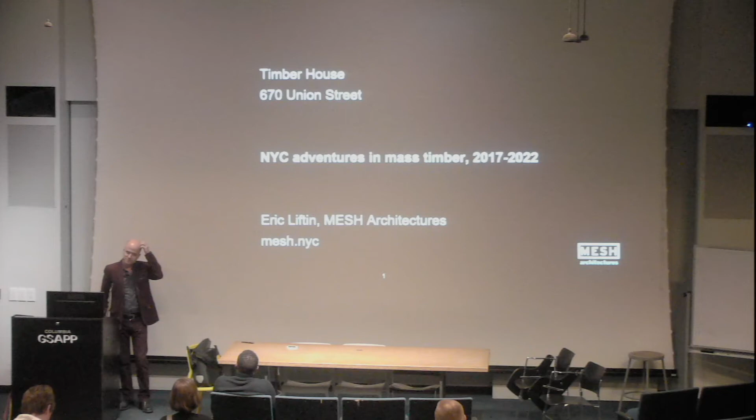First of all, just out of curiosity, how many people are from the real estate program that are here? Pretty much everybody, okay. Is there anyone from architecture? Yep, okay, and you're in both, I know that. Okay, great. So I'll get right into it.

So I had done a few years ago another project with the same partners. I came at it as a developer and architect, but I had partners who were providing the big funding, and there's another small family development company called the Brooklyn Home Company. They do their own projects, but we had partnered on this project on Congress Street in Brooklyn, and it worked out well. It's a pretty small project, but we did some nice things with it, and we decided to do another one together. A friend of mine lived on this block and told me about these two houses that were for sale.

This is interesting how these things happen. Finding a site is one of the most challenging things, and if you just look at the ads from the real estate brokers, that's not always going to do it. But this was from a guy I knew, lived on the block, knew about these people selling these houses. We thought, this is interesting. You don't often see these two houses come up for sale in a nice neighborhood like this in Park Slope. So those are the two houses, and we came to a deal to acquire those.

And then we started talking to people next door to see if we could get another house and try to expand our site, which is the first thing, of course, that you try to do in this situation. We were interested in this one. It had been abandoned for many years. No one knew where the owners had gone to. We had the help of an Israeli real estate broker named Patrick, who was an incredible detective, and he was able to find these guys upstate. They had left in the middle of the night one time and never come back. And so we were able to make a deal to buy that one.

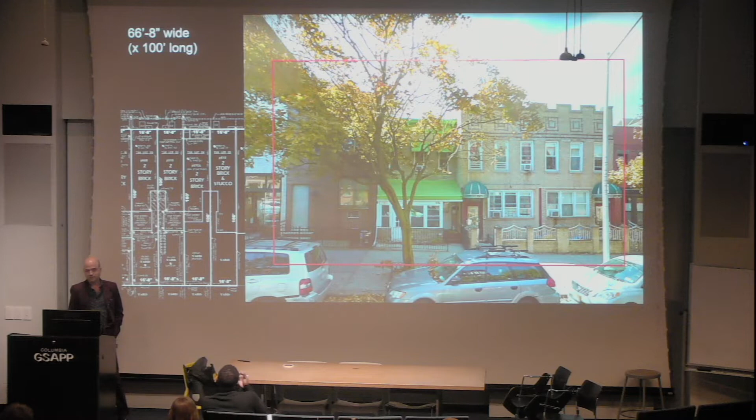Then the one in the middle, that worked out too. We got that one as well. So we had all four sites, which is great. This block of Union Street has a very colorful past, which I won't get into. It had fairly unsavory things happening back in the 80s, and now of course the whole neighborhood's changing. So we had the four sites together, 66 feet 8 inches wide, which is a nice site to have. It's 100 feet long, which is a very typical length in New York City. It's on Union Street, which also has the benefit of being a denser zoning district than the neighboring districts. It's an FAR 3. Most of the ones around there are FAR 2. So that gives you denser.

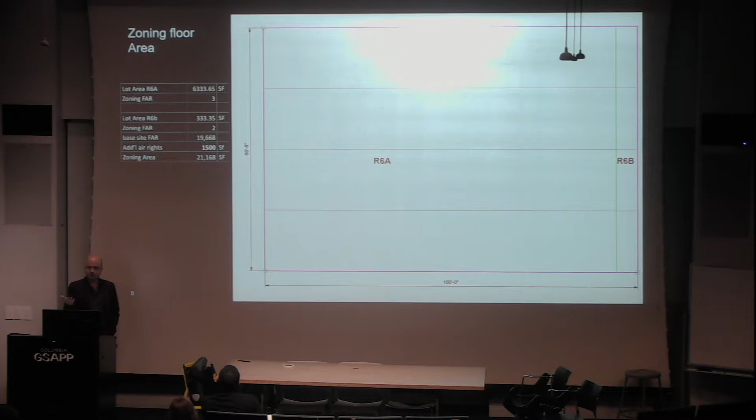How many people are familiar with zoning? You guys have had that already? Yep, all right, so you've done that already.

So the first thing, of course, we want to do was a quick test fit of the site, see what we can do with it. We know we have our 30-foot rear yard. As you probably know, New York City zoning is very prescriptive. A lot of the time the zoning envelope ends up being your building envelope, depending on what your site looks like. This is a 70-foot height limit, and so what the zoning indirectly suggests is a 7-story building with a 70-foot height limit.

I don't like to do that because that gives you, at best, a 9-foot ceiling height, and often lower because you're dropping the ceiling for ventilation and such. An 8-foot, 8.5-foot, 9-foot ceiling, not so great. So I like to do a 6-story building with a 70-foot height limit. That means even more that to get all of your floor area, and as you know, you need to use all the floor area you possibly can, you're basically building out the whole envelope. So you're going to have your 30-foot rear yard. You're going to put your core there in the middle.

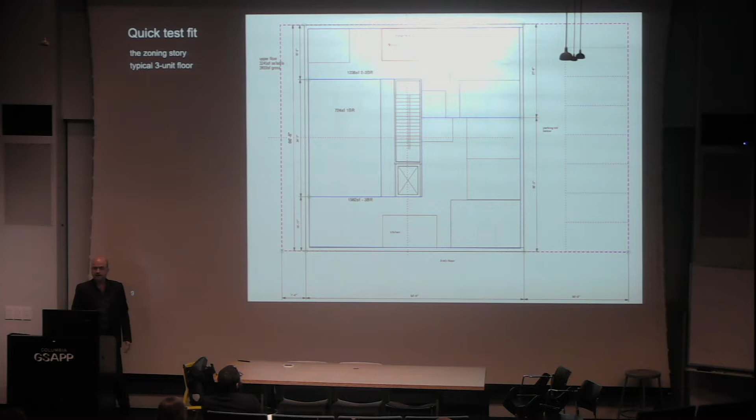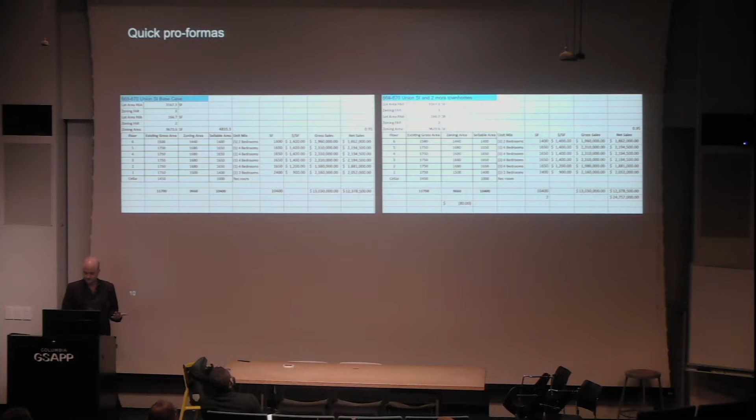That's going to be about 25 feet in the front, 25 feet in the back, and then you can do a very quick test fit and see how things are going to lay out, and use that to do a quick pro forma to see how it looks. We did it first with our 2 houses. After we got our 4 houses, we upgraded it to the larger site. And once that was looking pretty good, we took that into the deeper pro forma to really see what we could do.

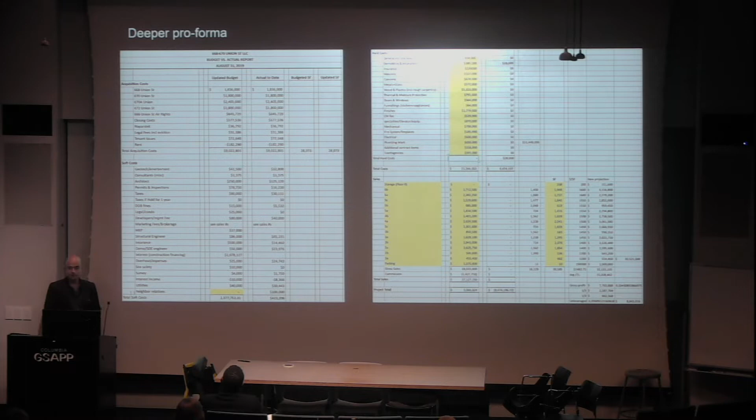Now, as you can imagine, some of this is fairly predictable. Things like the costs, the soft costs, the hard costs to a certain extent are fairly predictable within a certain margin of error. But many things are not very predictable, such as how you're going to sell the units a few years from now. What is the market going to look like? You usually have no idea. You also don't really know how long it's going to take. You usually underestimate that. It usually takes longer than you imagine, which is probably good, because if you really knew how long it would take, you would lose a little bit of the incentive to do the project in the first place, because it takes a long time.

One thing that I did note, we wanted to do a high performance building. How many of you guys are familiar with Passive House? Okay, so everyone's familiar with that. So as you know, that involves making a low energy building that has lots of insulation, although the New York City energy code is pretty much catching up to Passive House standards, at least in terms of the amount of insulation you have to use, the air sealing you have to use. We have high performance windows, triple glazed that seal well, and of course we're going to have ventilation because our building is so well sealed.

We're going to use ERVs to get fresh air in, and to avoid losing that energy of exchanging air, we're going to exchange the energy of the exhausting air with the incoming air to get ventilation continuously. And of course we're going to have no gas, no combustion anywhere in the building. We're going to heat our food, heat our air, heat our water, all using electricity. And so all the energy coming in to do those things comes now from partially renewable sources, but eventually it'll come from energy that's mostly renewable, we hope, in the next 20 years or so. And we're preparing for that future by not doing any combustion. Not burning anything also helps because we don't need flues to be continually exhausting air out of the building, which wreaks havoc on your envelope.

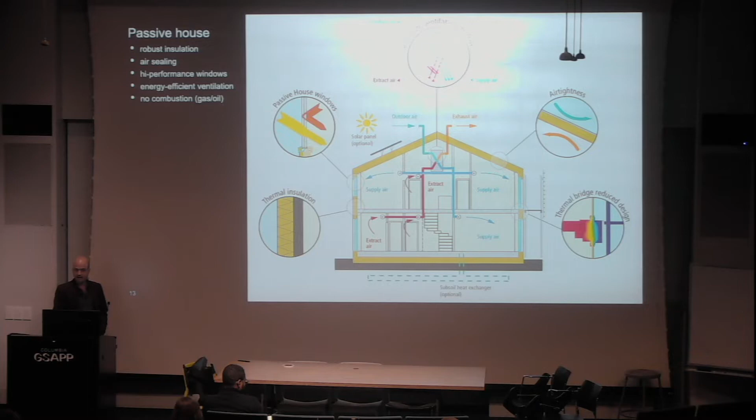So recently I'd been on a jury at Pratt, and the students were studying CLT. And I thought it was pretty cool. I knew about CLT, I knew people were using it, but I hadn't really thought about doing it in New York because it just didn't seem like a New York kind of thing. And so I thought, well, this would be cool. Could we use CLT in New York? And how many people are familiar with what CLT is and mass timber is? Okay, so, pretty much everybody. Okay, well, I'll go through it pretty quickly. Sorry for the review for those who already know about it.

But the advantage of CLT is it's made from taking small dimensional lumber from quick-growing trees from sustainably managed forests, usually out west or north of us in Canada, and using that to get large members made out of wood that you used to have to get out of old growth trees that are 100 years old that are not really practical to harvest anymore. So these quick-growing trees can be harvested, cut into dimensional lumber, 2x6s, 2x8s, laminated together into larger members that we can use to make structures.

The advantage of this is that compared to construction made of steel or concrete, it has lower embodied energy, so that there's not as much energy needed to make it, which is less carbon that is output into the atmosphere and less energy required all around. And it also sequesters carbon.

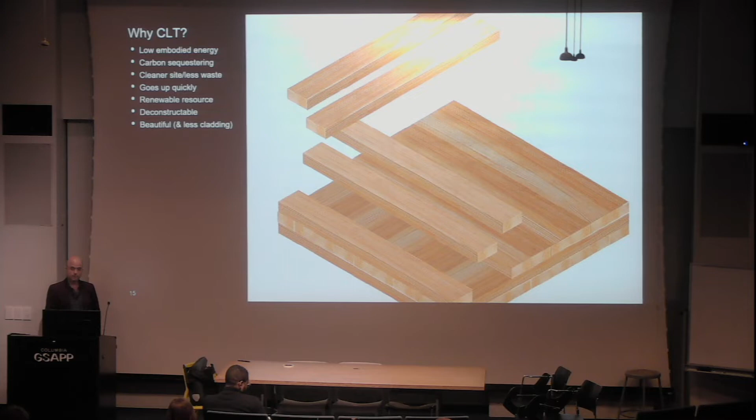So the other thing is that building on a site is complicated, potentially dangerous, expensive, tricky in New York City where everything is so tight. These buildings go up faster, they go up cleaner, there's less waste. Everything arrives at site ready to go. You put it up, you don't have concrete spatter all over the place. It's much, much cleaner in that respect as well.

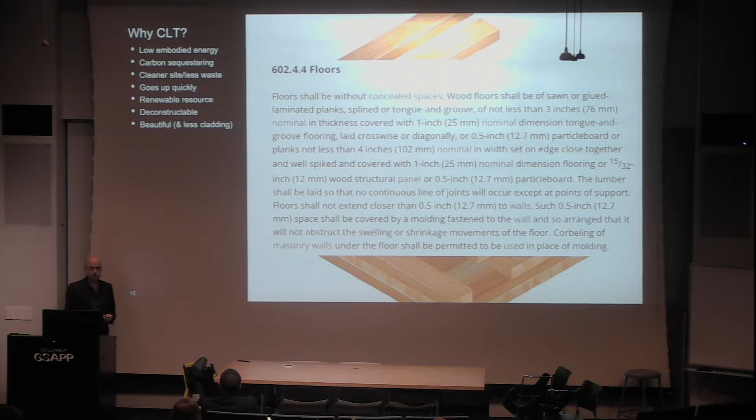But the question is, could we do it in New York? So looking at the code, we have heavy timber as a construction type. It's been there for decades. And it does not mention CLT. So the question is, would the New York City Department of Buildings let us do it? Would it be acceptable under code? And there are some precedents.

At the time when we were doing this design, these are two buildings made out of mass timber in Brooklyn. At the time we were doing this, they were under construction; they're now completed. The one on the left is made out of NLT, nail laminated timber, which is made out of boards that are nailed together instead of laminated with glue. And that's an old way of making mass timber that was in the code because it's old.

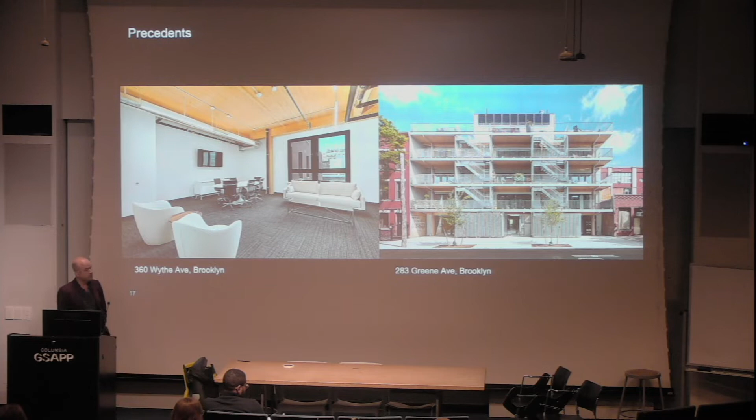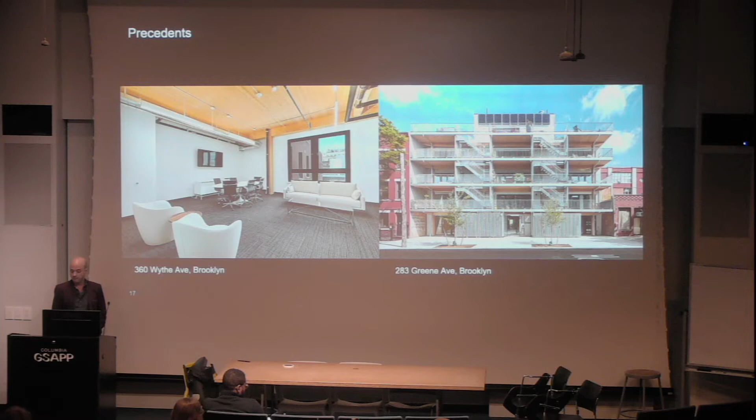And on the right, we have a CLT building on Greene Avenue in Brooklyn, developed by a friend of mine. And that was under construction, and I was hopeful because that building got approval and was going up and seemed to not have any problems, and so it gave me hope that the DOB would let us do it. And we decided to go forward.

So one of the things I love about mass timber is that it's made out of plants. And one of the great things about that is that when you look at it, you can see that. You can see the plants, you can see the patterns of the organic process, you can see the depth, the fractal depth of the material. In fact, neuroscience has demonstrated that we respond more emotionally to surface than to spatial quality. We normally think of architecture as being mostly about the spatial quality, but in fact, the surface is incredibly important. We respond to it, it engages us, engages our unconscious mind and our emotions.

And we respond very well to these natural materials that engage us because in their complexity and the fact that they're non-repetitive, you're looking for patterns. And that has the effect of both stimulating us and calming us at the same time. So it's a very good effect. And so it led to the theme of the building, the concept that guided us throughout, which is this notion of creating life, creating a sense of life in the building.

So to take a very quick detour, at the same time I embarked on a little side project to design tiles. And these tiles are hexagonal tiles, also based on the notion of creating life. And hexagons, of course, are found throughout nature, both in organic and inorganic processes. You know, in crystals, in beehives, in fruits and vegetables. It's one of the ways nature likes to arrange materials, molecules. And so we can do that in tiles too.

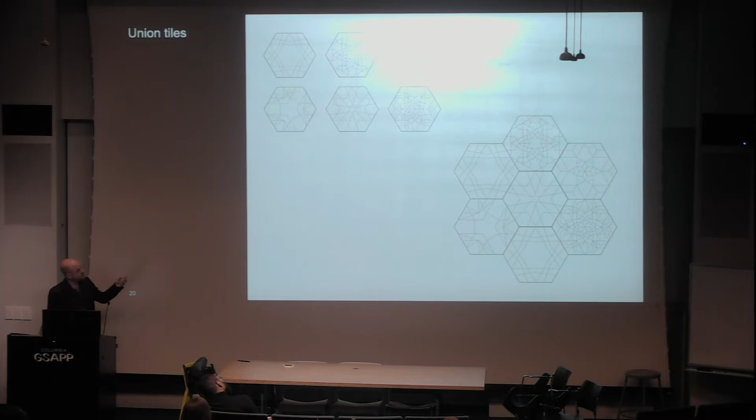And I thought we could combine patterns in tiles in non-repeating complex ways based on simple units. And so we can design tiles with these different patterns, combine them, and you can see how they link together to form these larger patterns as they combine. We can do them in different colors, and they can create these different kinds of patterns that, again, engage your mind and kind of draw you in and become part of the fabric of the building.

So back to the design process we went through. Now we're, again, looking at that site. Most of the buildings on this block are 2-story, 3-story buildings. They're masonry buildings of brick, punched openings for windows, 17 feet wide. We have 4 of them. So we thought, okay, our first 2 or 3 stories can have a dialogue with those other buildings, so it doesn't seem like a 70-foot alien craft has landed on this site.

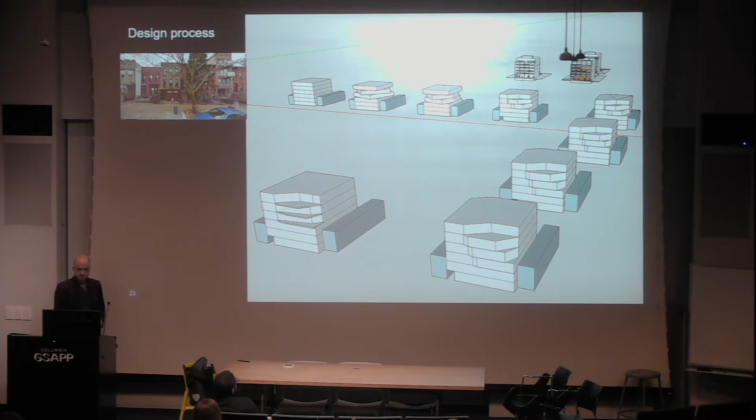So we can engage those buildings on that lower level, and as we go up, we can then open up more to the views that we have available, and also do a little bit more with the design as it goes up as well. So we started iterating on that and building models that would do that, starting with the punched openings at the bottom, then opening up as it went up. We experimented with different colors, different kinds of brick, and ended up with this pattern, which again has these bricks on the lower level, has the windows that are actually on the same module as the 17-foot houses on the block, so that there's kind of a correspondence there.

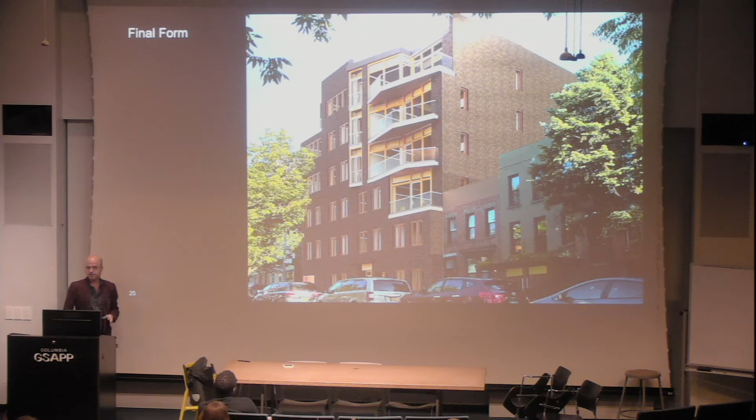But then it opens up, and you see the glass above that's oriented towards the west and the north, where we have the central Brooklyn skyline, and to the west, the Manhattan skyline. Even though the first set of bricks were made to match the darker bricks that are more prevalent on the street, it felt a little bit dark, especially for a big building like that, so we ended up going with the lighter brick. This became our design going forward.

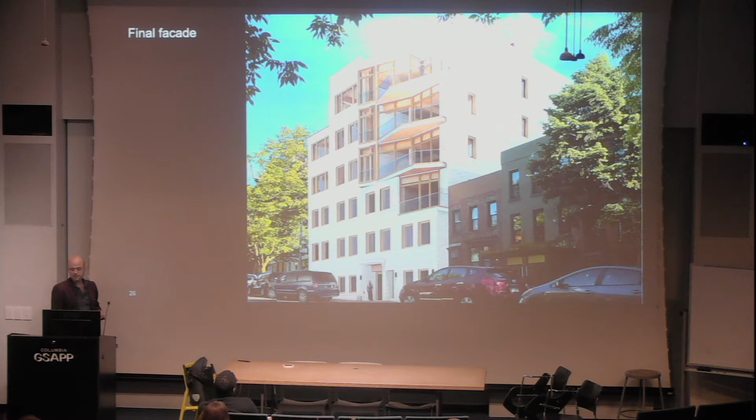We built a Revit model. You guys probably know about Revit. This is BIM, Building Information Modeling, and the whole building was built in very fine detail on the computer, which is good for, of course, the design process. It's how we generate our drawings, and it's particularly important when we're doing something in mass timber, because this model is used to actually fabricate the elements for the building itself.

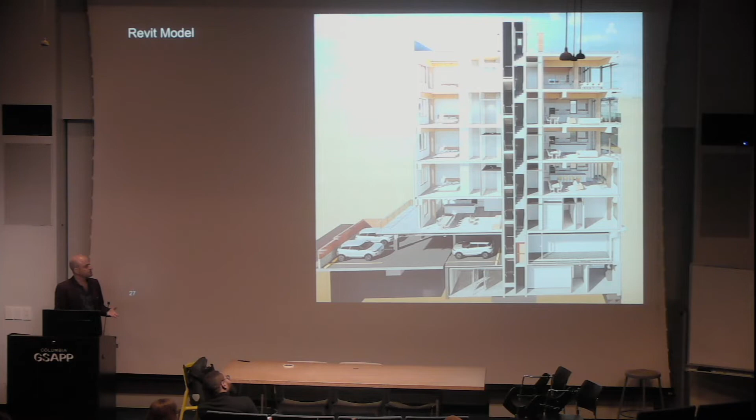We also technologically use VR. So this is a great tool. This is, again, just a simple consumer Oculus headset. And then we take our model and we dive into it. We go inside and we walk around the spaces. We make sure they feel good. We see how the ceiling height feels. We see how the materials feel. We see how the proportions feel. There's no substitute. Looking at renderings, looking at physical models, nothing substitutes for actually going into your building and feeling it.

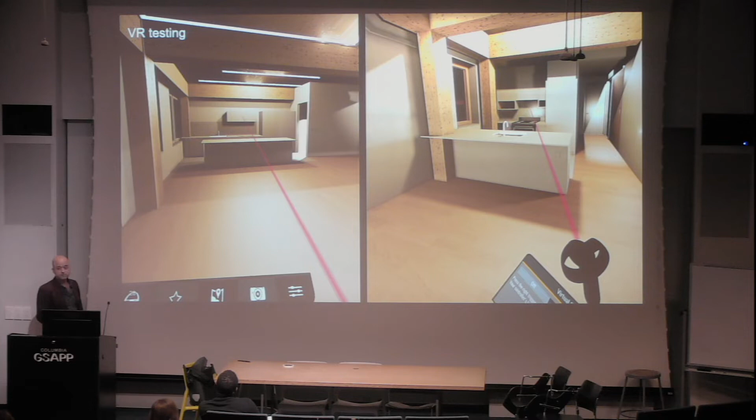How many of you have experienced walking around a building with a VR headset? Have you all done that before? Okay, so maybe half. But if you haven't done it, it's transformative in terms of really understanding what a building is going to feel like when it's done.

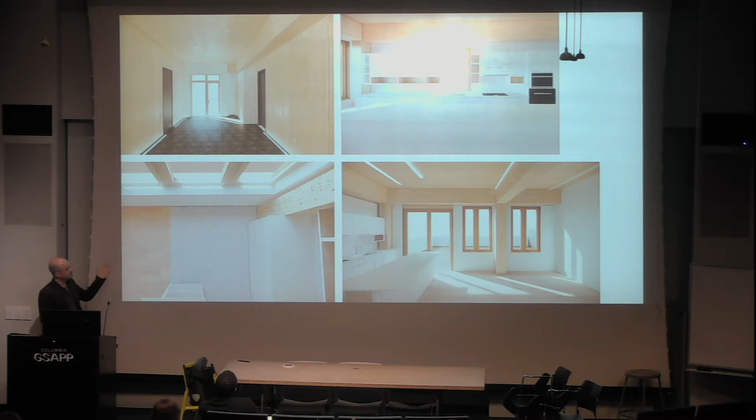So we ended up with this design. You can see down here the tiles that we have in the kitchen, the tiles there in the lobby, and you can see the CLT, the mass timber elements being exposed as part of the design. We have the front entrance with the brick and the lobby, where you come into a timber entry here to kind of get you into the building.

Then going upstairs into the apartments, we have our living rooms. This is one of the upper floors with the glass looking out over the tops of the other buildings and looking towards the kitchen. These are pretty open apartments, and as I said before, we're exposing the CLT wherever possible, so that it becomes part of the environment.

Let's go back to my concern I had with the Department of Buildings. So in October of 2019, we got approval from the Department of Buildings, and that was a great event because we had been working for many months to do that. We had to go through a long plan review process, long energy review process. These are not quick processes to go through, and so it was great to get that approval.

However, it became clear to me in the way those processes had gone that I don't think anybody at the DOB who looked at our drawings really registered that this was a mass timber building. It did not seem incredibly clear. I mean, it was all there in words, but they don't really look at your structural drawings because they don't really get that. They look at certain things and they ignore the great majority of what your building is made out of. So I was like, I don't think they really know it's a mass timber building at all.

So then it becomes, well, we have the approval. Should we just go forward, just like my friend on Greene Avenue did, and just go and build it and see what happens? But here's what I learned in the meantime while that process was going on. My friend at Greene Avenue had his site shut down. DOB had rescinded his permit and given them a stop work order. I imagine someone from the DOB driving by the site one day and looking up and saying, oh my God, there's a big wooden building going up in Brooklyn. Where did that come from? And that led to them being shut down.

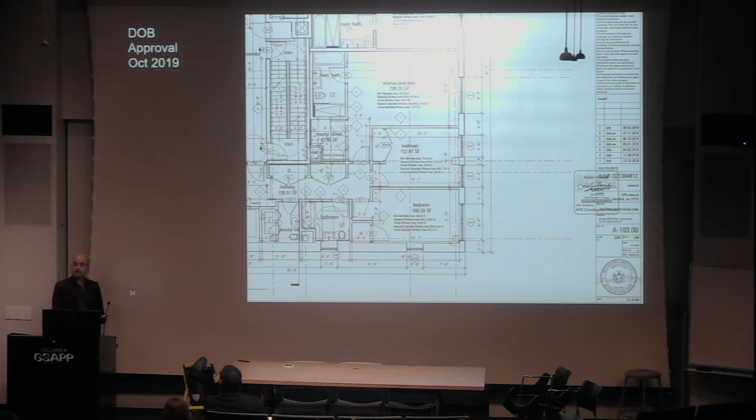So I was like, I don't want that to happen to me. It's too risky when you're doing a project like this. In fact, they eventually worked it out, but it took them 6 months, and they were tortured by the Department of Buildings in the process of getting their permit back. So I thought, okay, I'm going to come clean. I'm going to go to the Department of Buildings, get a meeting with these guys, and say, okay, I'm like the guys on Greene Avenue. Can I work with you in advance of starting my construction so that we all start on the same even path here? So I prepared my presentation, all of my data about char ratings for heavy timber structures.

They don't burn. When I talk to people about it, I'm like, yes, wood burns, but have you ever tried to light a big log in a fireplace? You can't just hold a lighter up to it and light it on fire. It's actually very difficult to get heavy wood members to catch on fire, and that's what heavy timber, or mass timber, does. It resists catching on fire for quite a while. And so I prepared all my things.

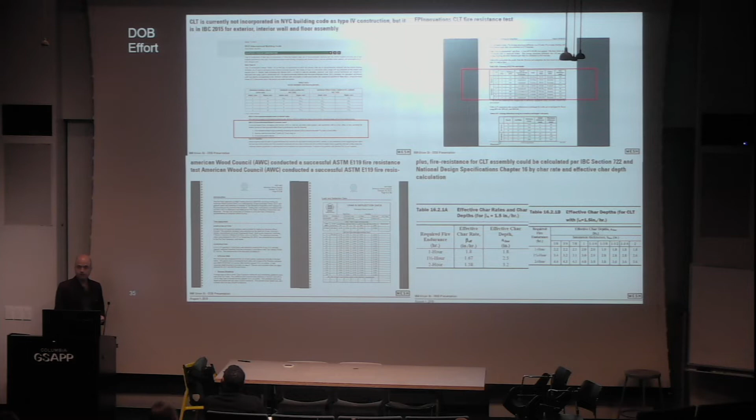I tried for months to get an appointment with them, and finally in December, I got an appointment with the Department of Buildings. I met with 4 high-level administrators. They're all perfectly nice people to sit and meet with. But they didn't smile much, and they didn't have much to tell me. And I found out a couple weeks later that nothing doing, you can't do your building. And sure enough, a few weeks later, I got an email that my approval had been rescinded, and I no longer had approval on this building.

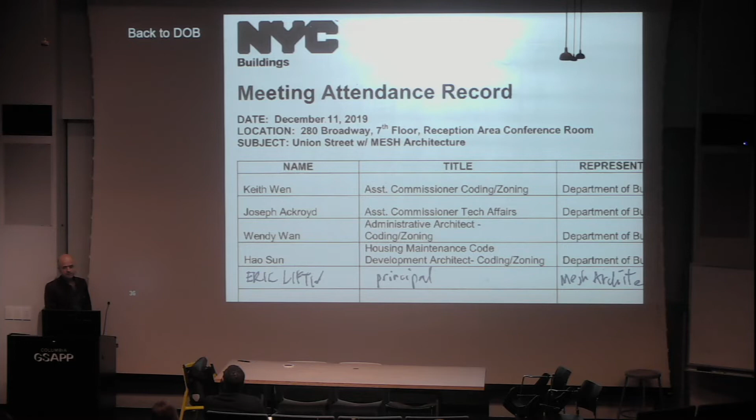So I didn't really give up. I was like, I'm going to keep going, and I'm going to go up the chain and see what else I can do. Meanwhile, we had gotten our demolition permit, and we started demolition of the houses. And that started at the end of 2019, and it was going perfectly well until COVID hit in the spring of 2020, which you know very well, and everything got shut down, including our construction site. So we got shut down about maybe 2/3 of the way through the demolition process.

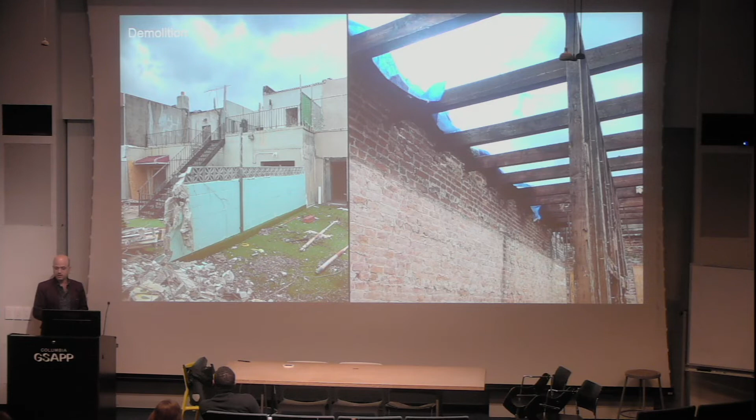But meanwhile, while that was going on, I learned something else, which is I met a new timber vendor called Vaagen Timbers in Washington, and they had another kind of mass timber, which is called glue laminated timber. Now, you guys know that cross-laminated timber is known for the layers, like it's structured like a piece of plywood blown up in scale. You have the fibers oriented in cross laminations. They go this way, then they go that way. In glue laminated timber, they all go the same way.

All the members, like these 2x8s, are compressed together and glued, and that's how you make your planks that form your floorboards. Glue laminated timber has been around for a long time, and it's in the old version of the code. By the way, if you don't know, the new version of the New York City building code came out early this year. It was supposed to come out in 2020.

It was delayed because of COVID and all the other crap that was going on in city government. And it finally came out, and it does allow CLT with limitations. But this was before that, and so I realized that this was in the code, and this was in my back pocket in case they would not let me use CLT.

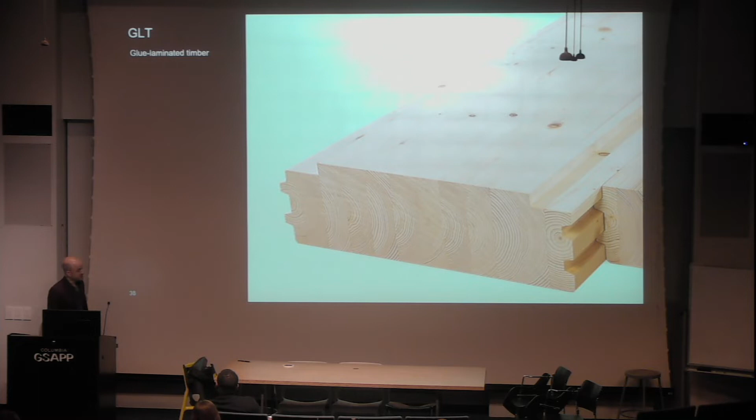As it happened, I worked for a while, and I ended up having a conversation with the commissioner. I got my councilman involved, who's a councilman in this district. We had this big conference call on Zoom, and that was in the summer of 2020, and he said, "I'm sorry, I'd like to help you. CLT is great, but no way. FDNY will never let me do it." So that was that. So we knew we were going to do GLT.

So we started our engineering process, and doing a mass timber building like this is really interesting because so much of it is prefabricated in a factory off-site. So I like to liken it to building a very large piece of IKEA furniture. When you get IKEA furniture, all the pieces come with these kind of funny notches and holes and all these little pieces. And then you put them all together and you put the little hardware bits in, and it all comes together pretty quickly with your special tools. And that's a little bit of the way these buildings are put together as well.

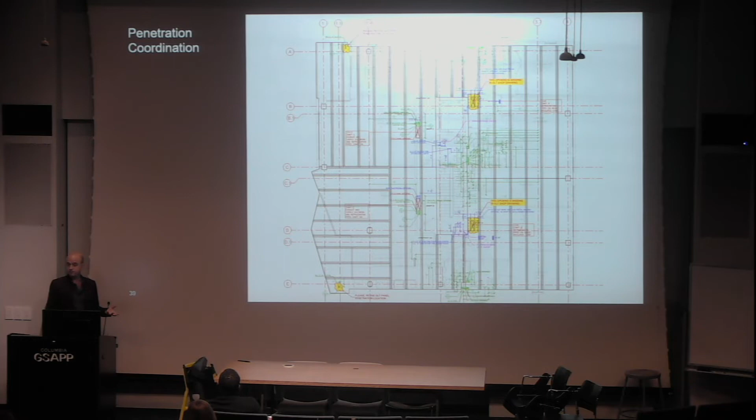And they're using our Revit model, which had to be built within a tolerance of 1/8 of an inch. So this wasn't like a quick 3D model just to see what the building's going to look like. This is absolutely precise because this model is going to be used to fabricate these pieces, which would be showing up later on a flatbed truck to be assembled on site.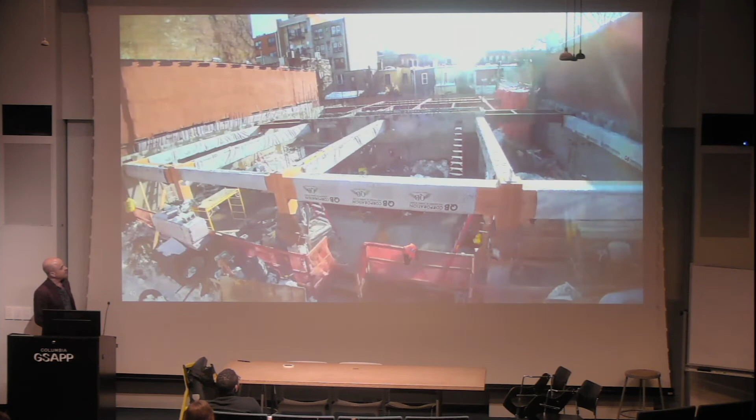So finally, in February of 2021, our timber shows up. This is that first day after we'd made the foundation, which of course is concrete. There are no foundations made of mass timber at this point. And timber started to go up. They came to a pretty good rhythm where there'd be 1 week of flatbed trucks arriving. They would offload the pieces onto the site with this big crane on this little Brooklyn street. And they would be lifted into place and assembled. Guys would sit there and bolt them in. And it went up really quickly, really cleanly. It was really incredibly gratifying to watch that happen.

Then after that week of assembling a floor of mass timber, they would do the core and the lot line walls. You see those on the lot lines, those firewalls made out of concrete block. FDNY is not going to let us do mass timber cores or lot line walls anytime soon. So even if you do a CLT building under the current code, you're still going to be doing concrete cores and concrete firewalls because they don't trust it, even though data does suggest, and people do them in other locales, that it'll be fine, that it resists fire for the time that you need to get your required ratings. FDNY is not going to let us do it because they don't want firefighters roaming up and down wooden stairways.

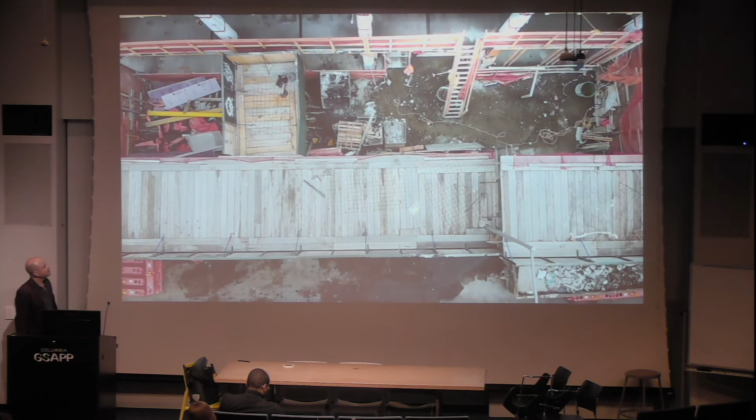So that was an interesting little process, and so it went a week of concrete, a week of timber, back and forth for several weeks until we got to the top of our 6-story building. You see the top of the Guatemalan flag from when they topped out. This is a nice overview of about halfway through that process. You can see what the site looks like as it went through. And you'll see those metal straps. So we have all those timber deck panels that have to sit on the top.

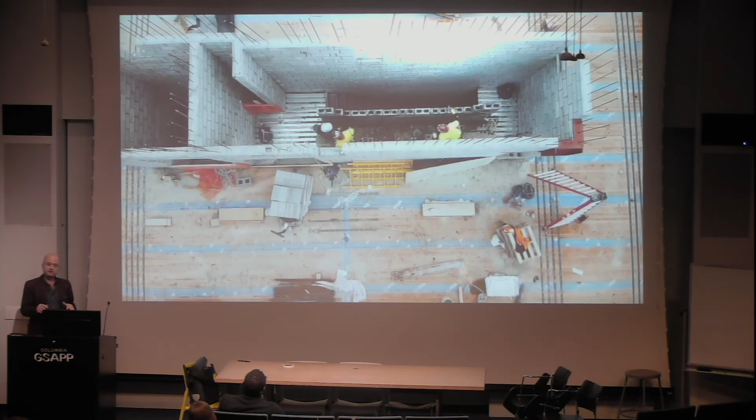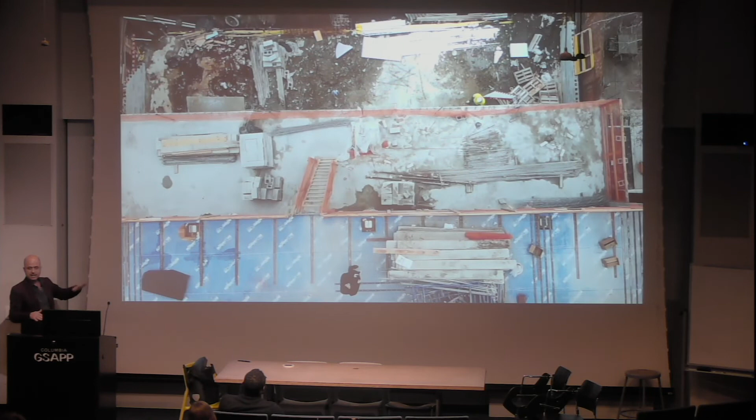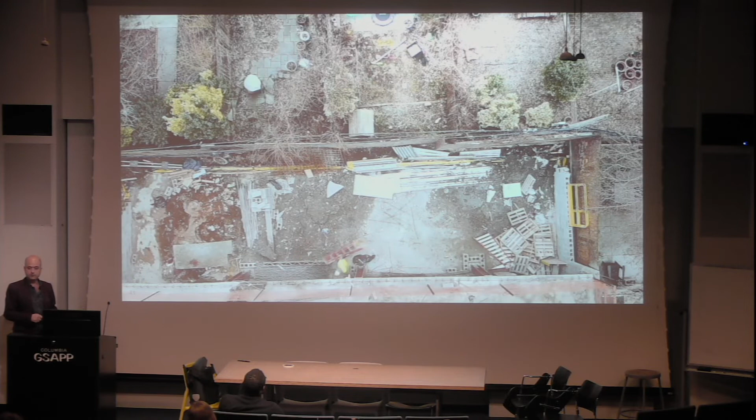Those straps tie everything together so that the whole wooden structure can act as a diaphragm to resist lateral forces. So normally you'd have reinforced concrete decks, and that would take care of that. In this case, we have the wooden decks connected by those straps. That's something we had to add because we weren't using CLT. CLT is better at doing that kind of stuff, but glue laminated timber only works in one direction, so that required those straps to go in the other direction.

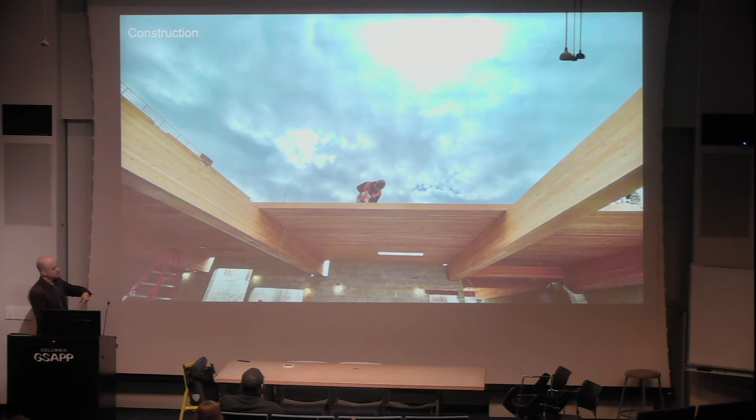Nice image of how those panels would go in. They drop into place. Guys would go with the screw guns and screw everything down. It's just done by a few carpenters. It's a very nice and neat operation. And it looked great going in. It was very satisfying to see these kind of spaces start to take shape.

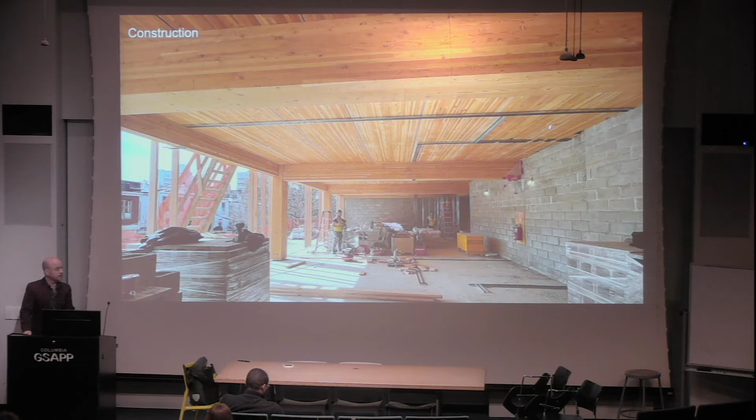Now, of course, our goal from the beginning was to have these ceilings in the structure all be exposed. So when you're in your space, you have this nice tall ceiling, and you have the timber ceiling. Of course, the only way we could accomplish that is by putting all the other stuff that needs to go in your building in the side spaces. So you have an uncountable number of ducts, electrical conduit, plumbing lines, sprinkler lines. All these things have to be packed into your building.

These are the modern requirements. And so all of these are packed into the non-major spaces, your corridors, your bathrooms, your closets. All of those are packed to the gills with all these things. And so normally, when you're doing a regular building, your engineer says, oh, great, okay, here's my air conditioning system. I'm going to put the ducts here. I'm going to put the conduit here. I'm going to put the sprinklers here.

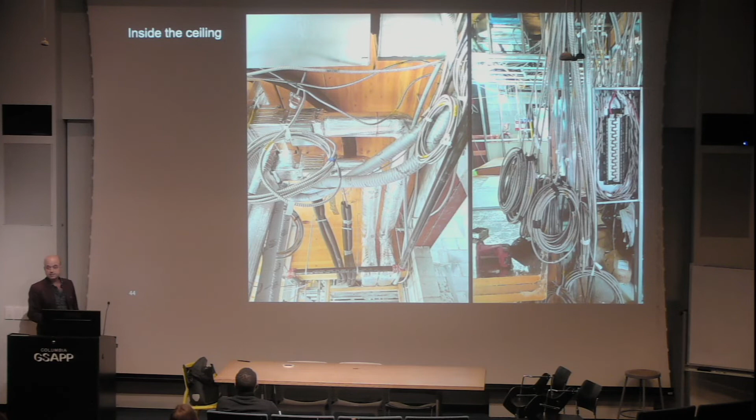It's pretty straightforward. In our case, we had to spend many, many hours plotting exactly where every duct run was going to be, where every sprinkler line was going to be, where we were going to run the electrical. Of course, in addition to regular HVAC stuff, we have the ERVs, the energy recovery ventilation that's distributing the fresh air. That's what those flexible hoses are. So we had to find places to run those as well. It's a lot of stuff that had to run in those limited spaces.

And so here's a little shot during the construction. You can see we're doing our air sealing. There's our smart membrane. So we have a stud wall that's filled with insulation. We're using mineral wool insulation. Then we have another layer of studs, that skinnier level of studs. That's our cavity wall, and that has all of our electrical running in it.

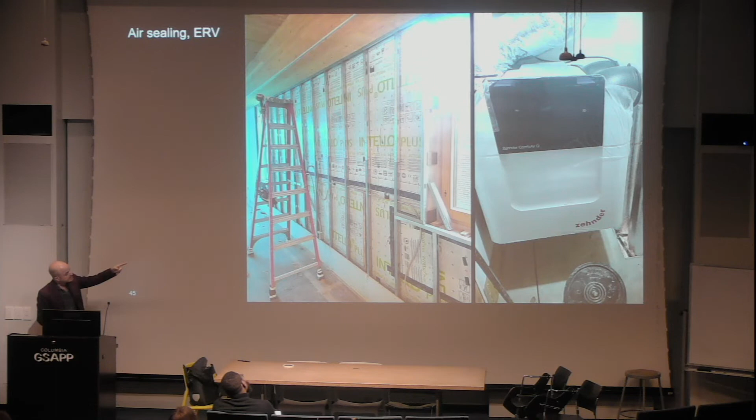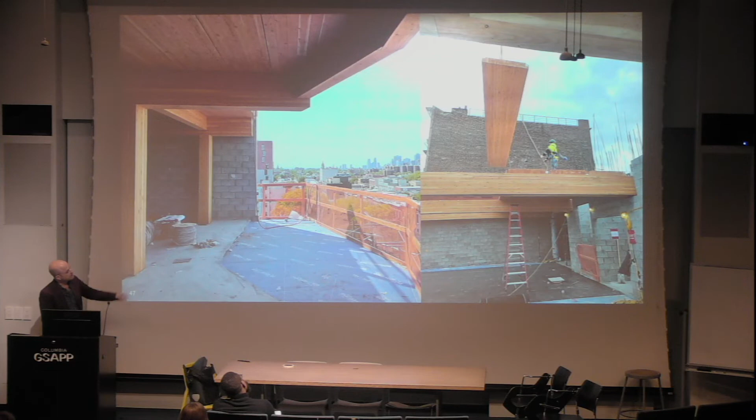So that's a way of not having all the electrical interrupt, or if the plumbing lines have to run, they run in there as well. That's a way of avoiding our insulation being sliced up by those lines running through there. And that's an ERV on the right. That's providing our ventilation. Another shot of the building in mid-construction. There is the top floor with the view of the Manhattan skyline in the background. There you see the planks being lifted into place.

We have beautiful bricks on the outside. These are bricks from Denmark by Petersen Tegl, and they are handmade bricks that have a lot of variation to them. So they are also part of this concept of creating a sense of life, of unevenness as opposed to monolithic qualities. We also got to experiment a bit with some masonry, doing some corbelling here at the entrance. You can see there how we have the balconies come out, and we reveal the timber at the underside of the balconies.

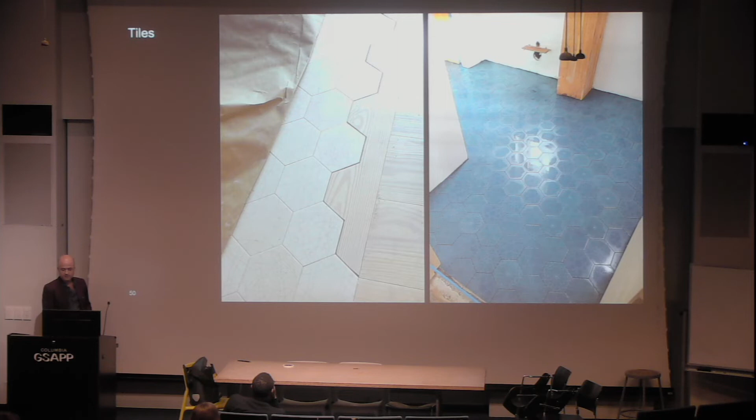If you remember the tiles, we had the tiles made in Turkey, and those started arriving about a couple months ago, and those have just been installed recently, and that was really cool to see how those got made and installed. That's a kitchen, some of the bathrooms get the blue tile, and then we have them as they look face on, and then we have them in the lobby as well in green.

So the spaces are starting to take shape. These are kitchens going in. Again, you can see how the timber ceilings are looking. This is the very top floor, the penthouse. These are the beautiful glass walls. These are, again, high performance glazing with triple glazed windows.

And then we also have really great lighting. We have these very skinny LED strips that are very minimal but very bright from a company called Kelvix in Washington. We spent a long time finding those as well. I didn't want to put big light fixtures up there, but this is a way of getting our lighting in a way that really creates this great glow in the apartments, very warm, and illuminates the wood as well, with a very minimal means.

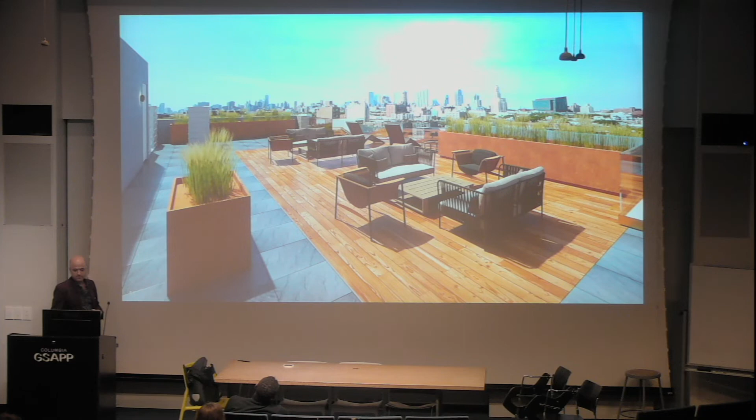We have a roof deck on top that has the great views of the Brooklyn skyline and the Manhattan skyline. And of course, on the back side of the roof, we have photovoltaic panels, so we're generating a bunch of electricity on the roof at the same time, which will help with all the loads for heating, cooling, and hot water in the building. And that's it.

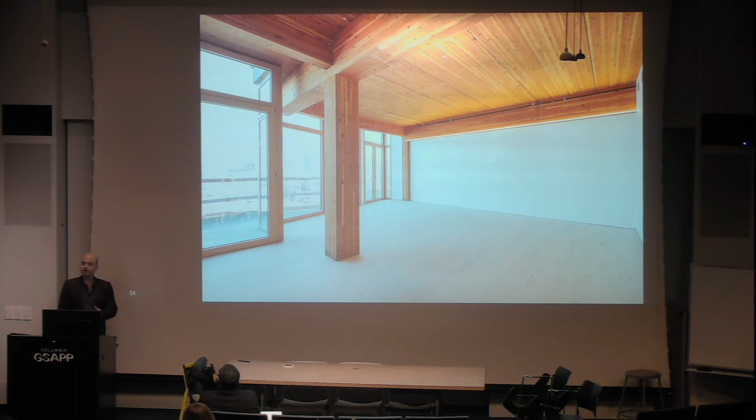Then you can remove the shores, and then you can go up and start the next level and start doing your new deck. So when you factor in all those things, it's actually faster. They admitted, these guys who are concrete people, they admitted it was faster than doing one of their concrete buildings that they were very familiar with. So that was actually a good thing.

Yeah, Jessica. It's so interesting, thank you. It's actually funny, this is where my kid went to daycare for 4 years, the site.

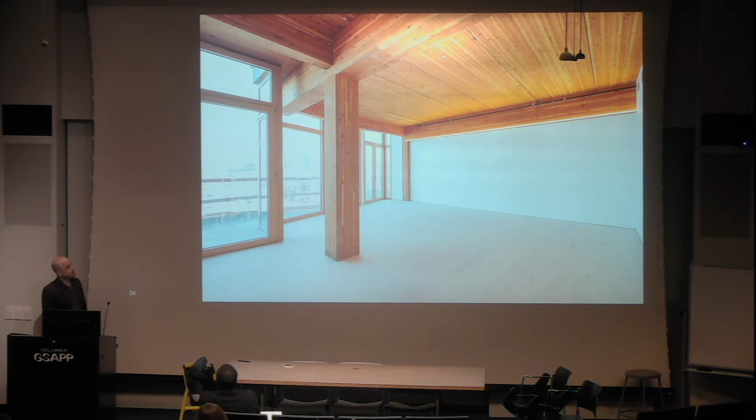Oh, right. I wanted to ask, is this something you want to do again? You have this specialized knowledge, and do you think it will be just so much faster coming over it? Yeah, so I definitely want to do it again. And this time I think we'll be able to use CLT, and I'm perfectly happy with what we got out of our GLT on this project, but I think it would be even better to use CLT.

It involves some engineering problems. When you have a big cutout, for example, because GLT is a one-way system, when you make a cutout, you have to reinforce that. There are a little more gymnastics you have to do to make it work. So yes, we want to do another CLT building, and I think the whole pre-engineering process will be much easier having gone through it once before, now that we're familiar with how everything gets put together.

And you know, I like to think that we would do it. We have a very good relationship with this contractor that we've been working with, and they will now be very familiar with it as well. So that would be a good match.

So one of the things that was a little bit difficult at the very beginning was the financial modeling for it, because people were not familiar with it. And the good thing is that we could talk to the CLT vendor and we could get costs from them pretty easily. So we could give them our drawings and say, can you give us a quick take on what this is going to cost? And they were able to do that, at least for the material. They couldn't say what it would cost to erect because that's up to the contractor, but they could at least say what the material is going to be.

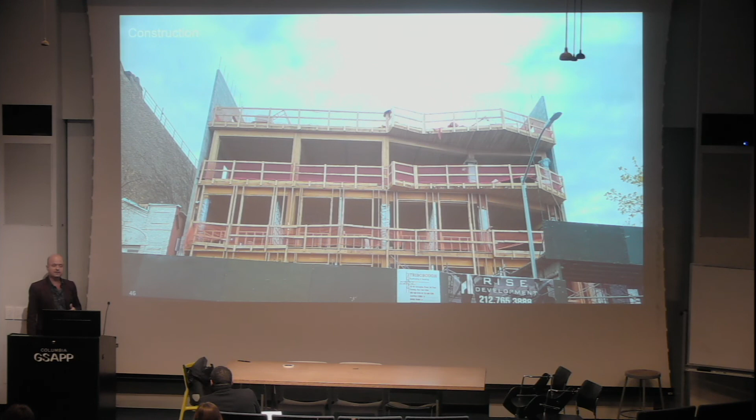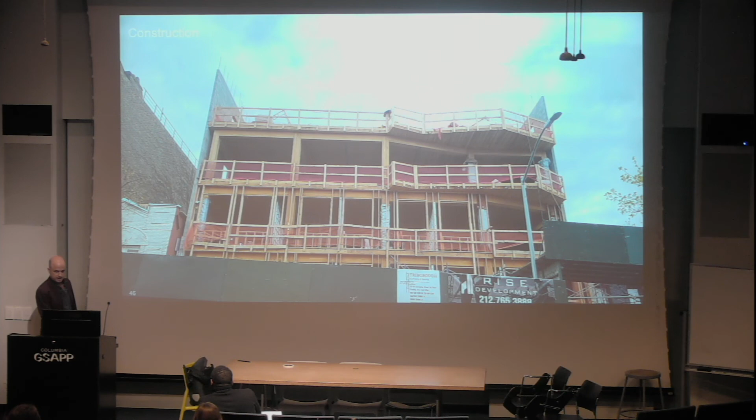You couldn't get tapered insulation for months. It took us, I think, 10 months to get tapered insulation, which we needed for our roof. So we needed to do a temporary roof on top of the deck in order to keep the weather out. And then I was very careful about what would be exposed during the life of the building. So we have the deck exposed on the bottom.

You can see the underside of that balcony is exposed timber, but that's not going to get any rain on it. It's subject to atmospheric moisture, but that's not going to hurt it. There's a sealer on it, which is good for generic moisture in the air. If we were getting hit with rain day after day, year after year, that would eventually take its toll, probably. But nothing is actually going to be exposed directly to the elements at the end.

And then, this is all brick on the facade, and at the edge of the balcony is going to be a metal flashing that's going to protect the edge as well.

With height. So right now we're, you know, New York City. There's International Building Code and there's New York City Building Code. So right now these CLT buildings would be done under the construction class of heavy timber, which is not what we ideally want. We don't want it in that category because that's a very limited category. But that's where it is for now. So you're not going to be seeing tall buildings made out of timber in New York City anytime soon.

This is all being driven by FDNY, which is very conservative and very reluctant to allow any of this stuff. It's not really the DOB proper that doesn't want people to build in timber. I was at various talks given by Woodworks, which is the advisory committee. They invited the people from FDNY, these officials, and were trying to explain to them why this is actually safe. It's being done all around the world, and it's a safe thing. But they've been very slow to come around to it, and so you will not be seeing tall timber buildings